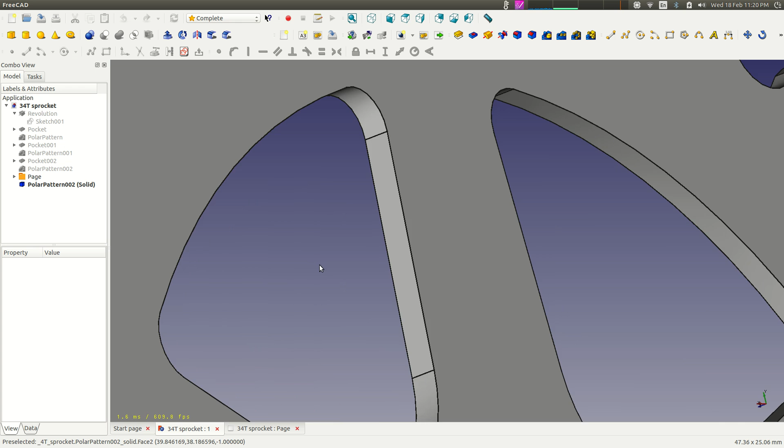I think with this one we're going to go over a few of the techniques we learned before, and we're going to try to build something a little more complicated, or just something that we're kind of used to. So today we're going to try to get this built here, just a regular bicycle sprocket, something pretty common, but has some interesting, difficult features that may not be as easy to make as it appears. So this is what we're going to try to make today, something similar anyways.

I'm not going to really worry myself with dimensions, but things like these should encompass all the tools that we learned before. So there's kind of a drawing schematic of it there. Not really that it has anything to do with anything, but all right, let's get it underway.

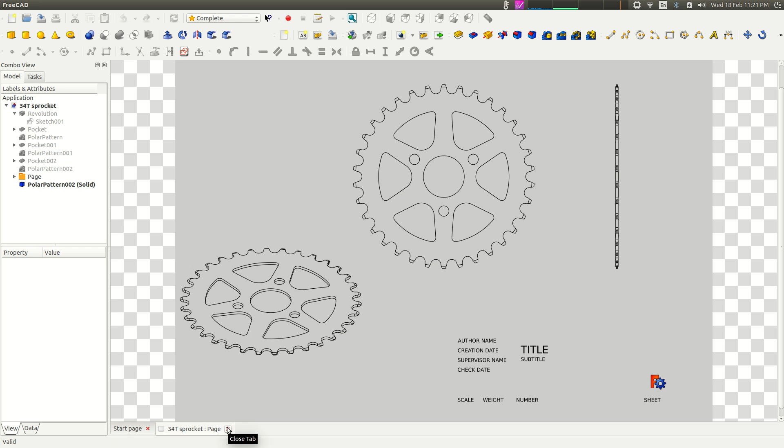So as before, you open FreeCAD, choose your workbench. I always like to do Complete, just because I've got everything I need. I don't have to switch between workbenches all the time, which is nice. So I'm going to open up a new one, call it whatever you want. I'm going to call it tutorial2, but where am I? Way in the middle of nowhere. Here we go. Alright, so tutorial2, we're going to make a sprocket.

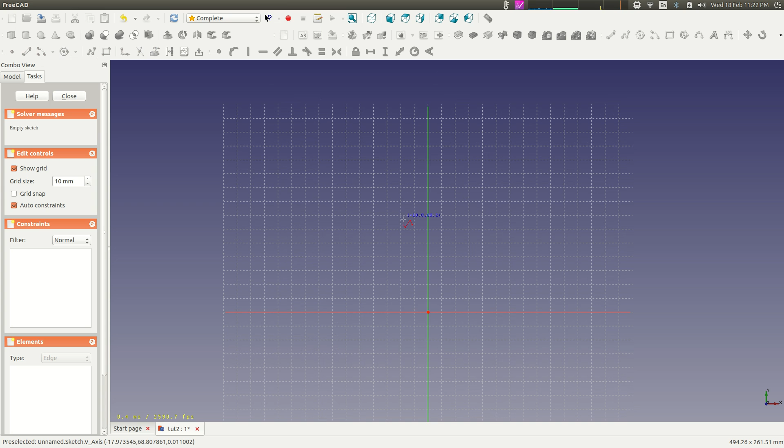So there's a number of ways we can go about this. Essentially everything looks like it's cut from a disk. So what we're going to do right off the bat is make a disk. As before, you're going to open up a sketch, put it on any axes you want, doesn't really matter. So this is where we'll start. The disk was pretty thin. I'm just going to use the polyline again. You noticed at the top that it had kind of a taper edge, so we could either make that now or we could make it later. I'm going to make it right now. So there's your sketch there.

Obviously now I've got to constrain it, so with everything, constraints is everything. And remember with revolving, we're revolving about this axis, and you notice that there's nothing on the other side of the axis, so that's really important. You can go right up to the axis, but you can't build stuff past it if you're going to revolve it, because then it'll revolve through itself and it'll throw a bunch of errors and you'll be pulling your hair out a little bit.

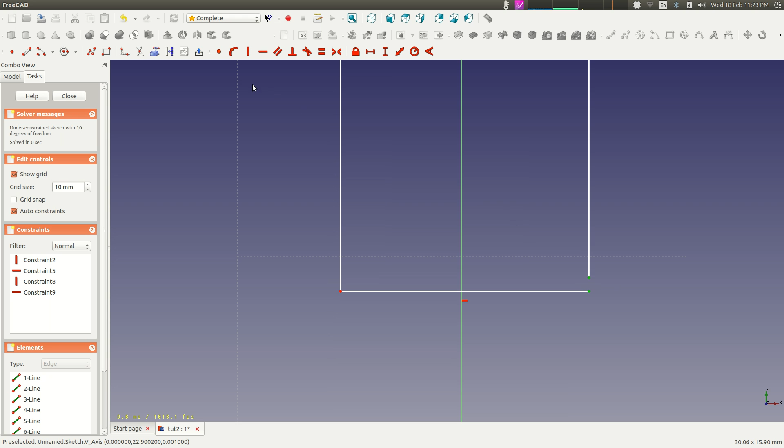As you can see, I've got some vertical constraints here that the computer's already preconceived that I wanted. I want this one horizontal as well, so I'm going to make that. As you notice, those are not touching, and we need a closed surface. So if I were to try to extrude this, it would not like that at all. So I'm going to make these two connect by using the coincident constraint, which is this dot one here, and it's going to bring them together. I'm going to check to make sure these ones are all okay. They all look like they're together, so that's good.

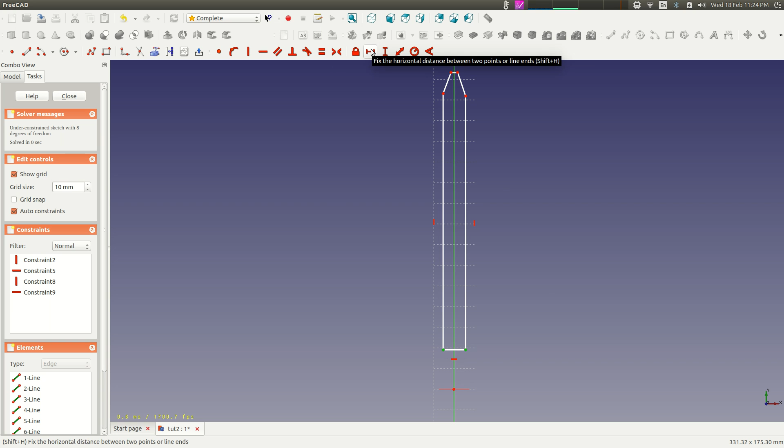So now we're going to start defining some dimensions on here. Let's make a width of this. This is all in mils, so typical sprockets are probably no more than 2 or 3 mils wide. Let's make it 3 millimeters wide and see where that takes us. As you can see, that did some pretty crazy stuff there. What I'm going to do is throw a symmetry constraint here to make things a little bit easier. I want those 2 points symmetrical about that line. Go up here, click symmetry constraint. As you can see, it's done just that. Similarly, I want those 2 points symmetrical about that line. I'm going to do just that.

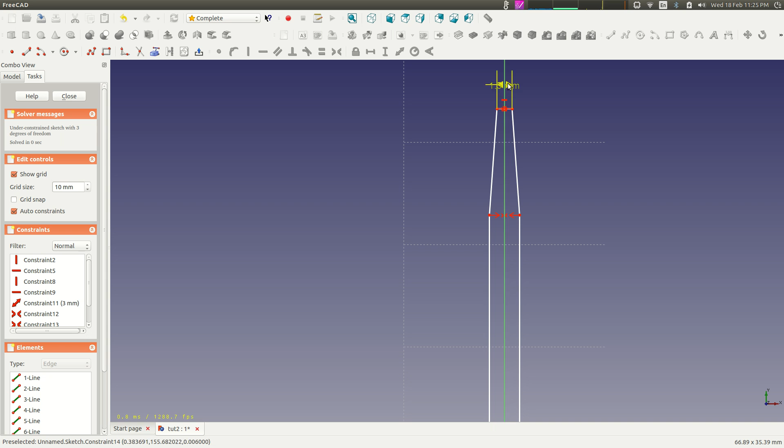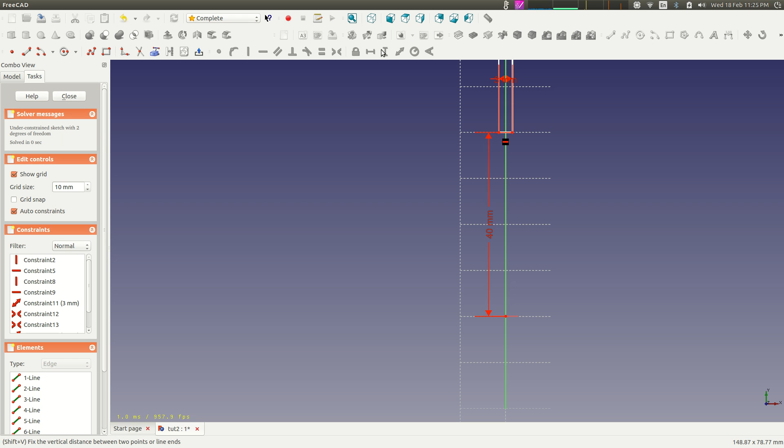I'm going to define this length here, so maybe the top edge is like 1.5 mils or something like that. Let's make it a little bit more. Let's make it 1 millimeter. A little bit more angle there. As you can see, it's a completely perfectly mirrored image. So there was some hole there. I'm going to make it maybe a 40 millimeter radius hole, which should give me some stuff to work with.

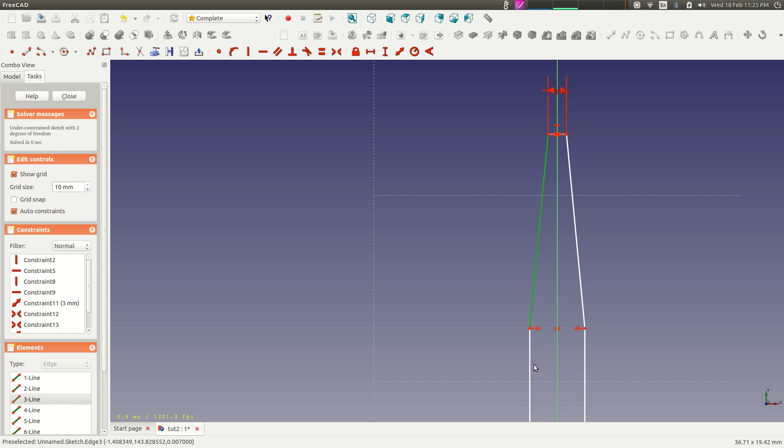Up here, say you needed a specific taper or a specific angle, let's say it needs to be 30 degrees between here or something like that. If you try to use the angle constraint, which is this one right here, you'll see that it doesn't make the angle where you want it to.

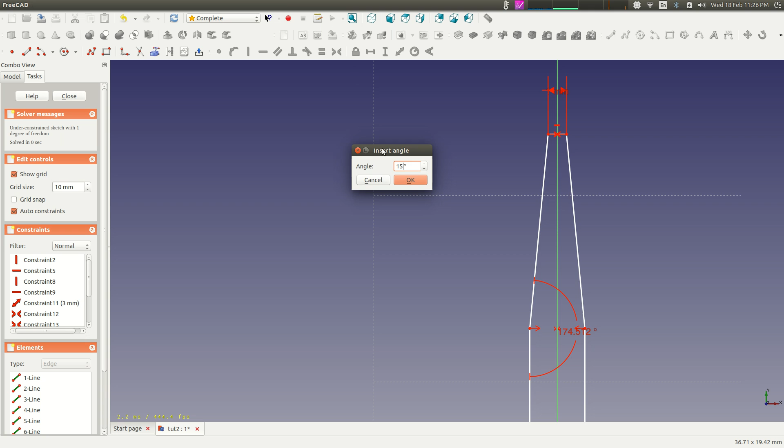So that could work. So you could do some math and kind of backtrack and figure out that if we needed 30 degrees over there, then this is going to be 150. So you could do it like that. Type 150. We get something like that, which means that this one over here, since this is 180, that's going to be 30 degrees.

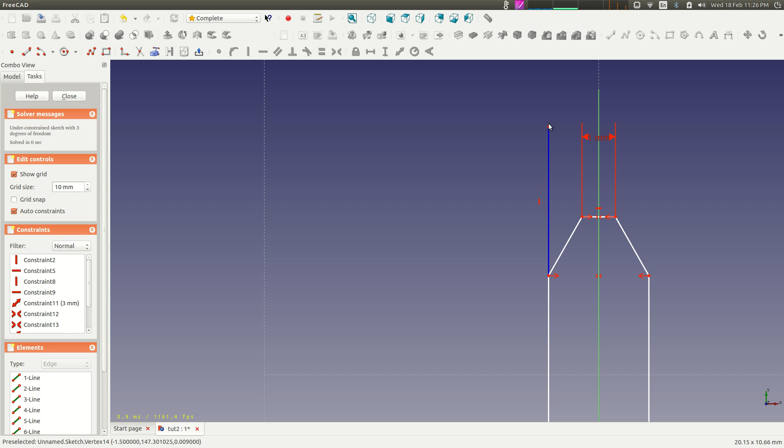And then what you can do is you can select that and this one, and you can make an angle between those, and I'm going to make it whatever I want. So that's another way you could go about it if you wanted to, which would make things easier in the end. Maybe you need it 18 degrees or something like that, something set by the manufacturer, whatever it is, right? So you got your angle there.

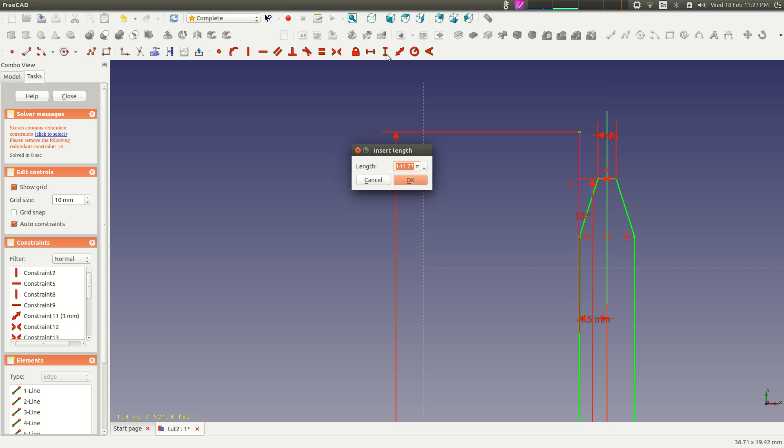Let's make an overall height on this. As you can see, I'm pretty much fully constrained here, but if you look over there, it's throwing some errors. So let's just go and see which ones it doesn't like. It doesn't like constraint number 18, so you go down, I'm going to delete it. Which makes sense because kind of given some things some height. And okay, so we're all set there.

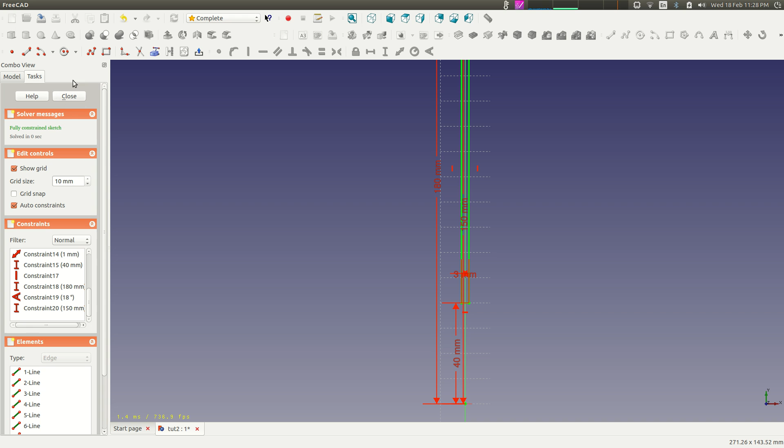I guess what I should have also done is the way I defined this line here made it kind of small, so it wasn't taking into account the actual height here. So I'll make that 180 as well. There we go. Alrighty, so we kind of got the cross section of our sprocket here. So now that I'm happy and that sketch is fully constrained, I'm going to close out of the sketch, and as you can see, I'm left with this here. So now I'm going to revolve this about an axis.

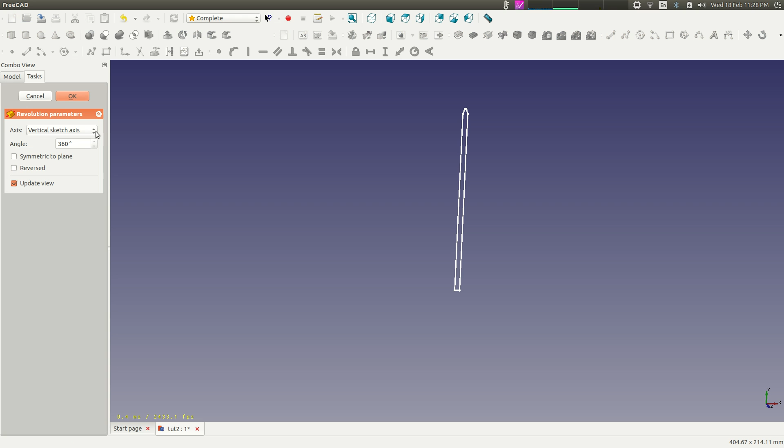So I'm going to go sketch there, and I'm going to click revolve. As you can see, it's trying to do it about the vertical sketch axis. I don't want it about that axis. I want it about the horizontal. And there it is there. Our nice pizza disc looking thing.

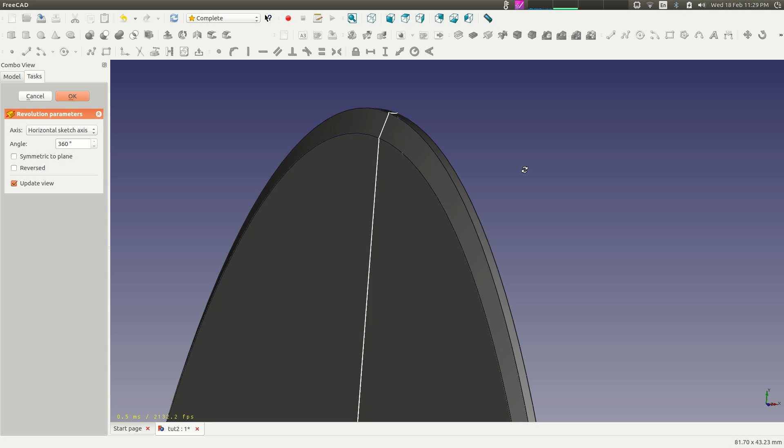So what we could have done is just obviously made a cylinder and then used our fillet tool to make this edge. But the problem is you can't define the angle of the chamfer or the fillet at this point. So it would just be at 45. So in this case, if you needed it to be at 30 degrees, something like that, then you would have had to draw on this anyways.

So we got our disc there. That's all looking good. We're happy with that. Click OK. So that's our revolution there. It's made up of this sketch. I'm going to unhighlight the sketch so we don't see it, because I don't really want to see the sketch anymore. So there's our disc. So now we can start making the teeth. Let's do that, because that's a hard part.

There's a number of ways we can do this. You could make 40 or 50 different sketches and try to cut each one out of this pizza disc here. Or you could make one pocket like we did in the last tutorial, and then polar pattern that pocket all the way around, which is a lot easier. So you only need to make essentially one cutout and then duplicate it around.

But remember, with polar patterns, only pockets can be patterned. So that's something to keep in mind. So you don't want to make an object, cut it out of this one, and then try to polar pattern that cut, because it won't pick up the cut. It won't recognize it. So it's best always to do a pocket.

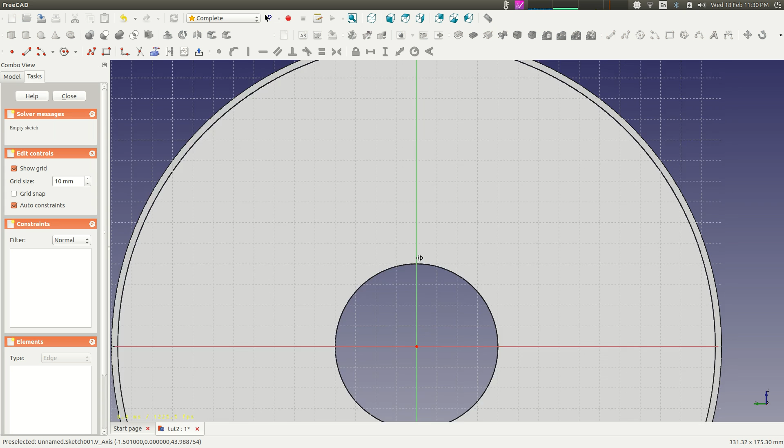So we're going to select the surface that I want to draw on. So that's the one there, and I'm going to create a sketch on that surface. So now that we got a sketch, I'm going to start making a cutout here. So in our thing, it kind of came down like this, looped a little bit, and then came back out. Kind of what a tooth looks like. So maybe you start with a circle, definitely a circle in there somewhere for the bearings of the chain.

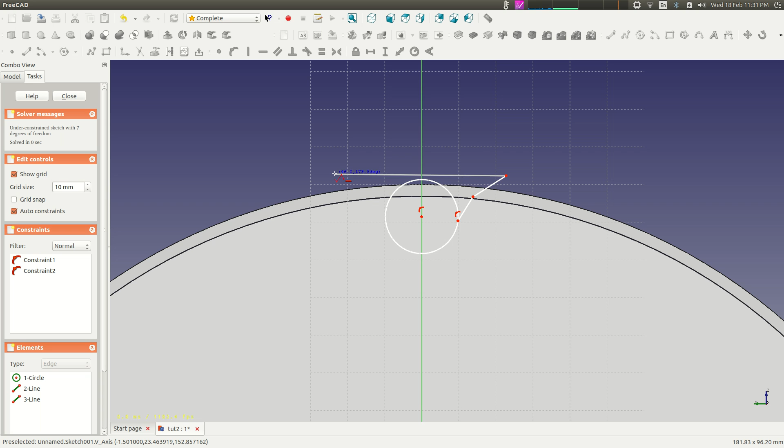And maybe it, actually I'm not going to use that, I'm going to use the polyline, so I don't have to keep clicking it every time. Maybe it comes up like this, and maybe there's a bit of angle on that as well, and then I'm just going to kind of put a random line out here. Doesn't really matter. Something like that again, and like that.

And so now I'm going to use the slice tool, or the snip tool, to get rid of that thing inside there. And really important with the snip tool is these have to be connected or it won't snip it. So if it's not working, that's one thing to look into to make sure that it is working.

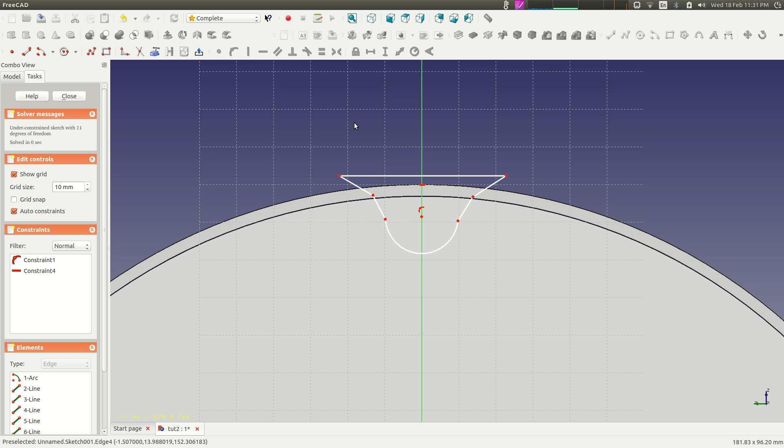So now, as you can see, there's a lot of constraints here to do. There's lots of degrees of freedom. So right off the bat, since I kind of want this to be symmetrical, I'm going to impose some symmetrical constraints here. So click 2 points and the line that I want it to be symmetrical over, and then create a symmetry constraint. Create a symmetry constraint with those and with these here.

So now if I change something over here, it's going to change on the other side. It's all mirrored about this axis right here. As you can see, this shows the 2 points that are constrained, and this little indicator here shows the axes that they're mirrored over.

So maybe I want something kind of like this. Maybe this needs to be down farther. It needs to be kind of like that. Maybe some dip like that. So that kind of looks like it could be a good cutout. Obviously, you can make these measurements if you're trying to duplicate something in real life, and then that's going to make things a lot easier.

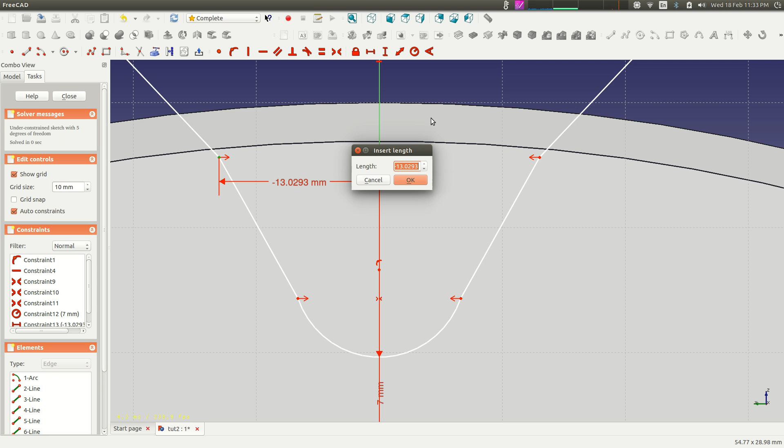So I'm going to make this 7. Make everything a little bit smaller here. Diameter. I'm going to define a width there. Maybe I'm going to make that 10. Oh, see, so I messed up there. I should have known that everything on this side measured from this axis over should be negative. So you see it crisscrossed it there. So we'll just go -10 and it fixes it right up.

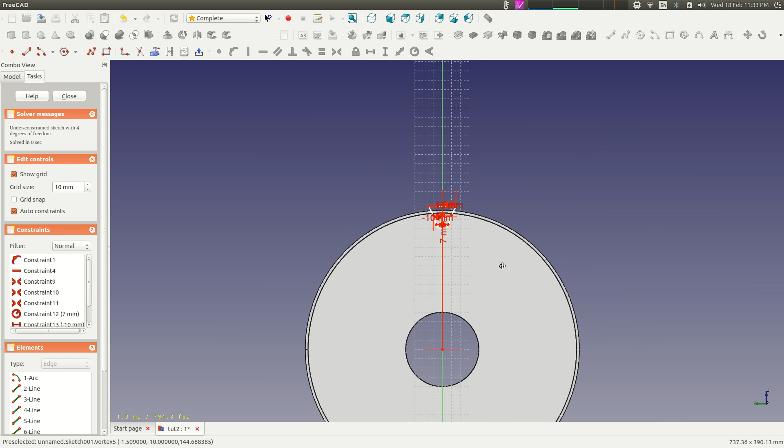So maybe I'll make sure that that's constrained as well. So maybe go 15. There's still a little bit of angle there. Maybe I want these a little bit lower though. Yeah, it's kind of looking good. This looks really high though, so I'm going to move this up a little bit. Oops. I'm going to impose a constraint to make these tangent. So make some tangent, which is really nice.

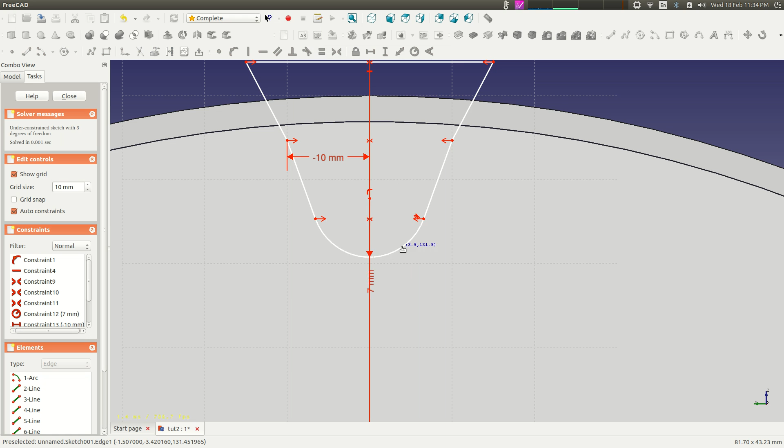So let's choose this height here. That'll add some constraint. Go 140. Looks high enough. Choose this length here. So yeah, we'll leave it at that. That looks okay. Choose this length here, and as you can see, I've fully constrained it. So it's happy with everything. Happy, happy, happy. So now I can extrude this if I want.

And if I want to make adjustments, like say I don't like these widths here, or I don't want that to be negative, maybe I want that over here, you can make the adjustments. So maybe I'll make this a little bit skinnier. So it obviously didn't like that I'm making it 9. I think that's because of this length here, so you might need to delete some of these in order to adjust these the way you want.

Oh, it doesn't really like that at all. I might make that 11. Doesn't seem to like that at all. Not quite sure why. Oh, there it is. Okay. Alright, so we'll try to make that again. I'm not sure why it wasn't liking that. Oh, it's because I forgot to delete it. There's something wrong over here, sorry. Delete that constraint there. There we go.

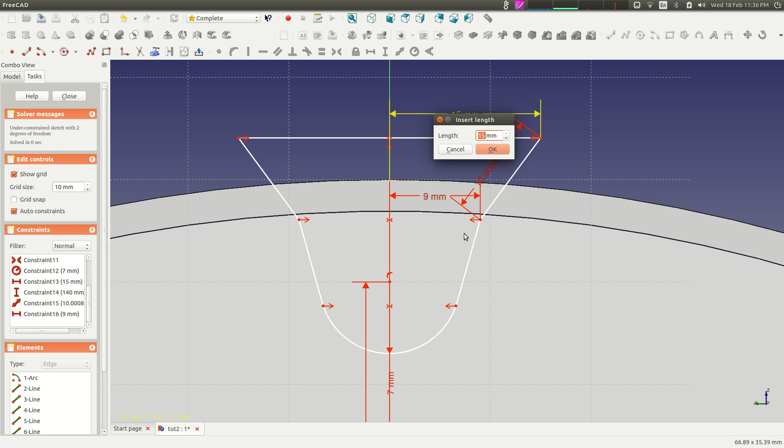So now, go back to 9. And yeah, maybe I won't make that one as much, because I see what I did here: I've actually defined the diameter of that circle there, and I've decided where the center of it was. It didn't like that, so make that 13 just to kind of get the right shape here. Yes, I mean, don't mind that.

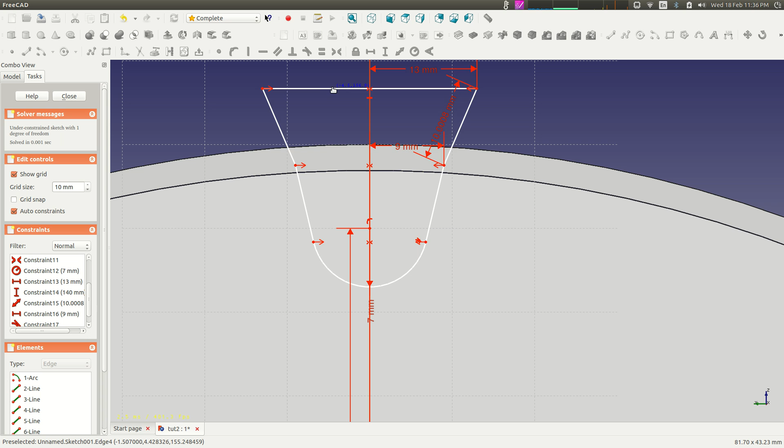I should be able to hopefully make those tangent, I think. There we go. There's still 1 degree of freedom left. That height there, so I'm just going to select that height. There we go. So now she's fully constrained. Good to go.

Alright, so this is one thing to consider when making gears and cogs and stuff like that: obviously there's inner dimensions, but there's also outside dimensions as well, right? Like the width of the teeth here, there's going to be some dimension to those, right? And obviously with the method I'm doing here, I'm not distinctly defining those.

But if you've defined these ones accurately and you've duplicated the exact number of teeth that there are, then by definition you've already defined the width of those teeth there, so it should all work out. It should be good. So you should still be able to get the correct width of teeth and stuff like that.

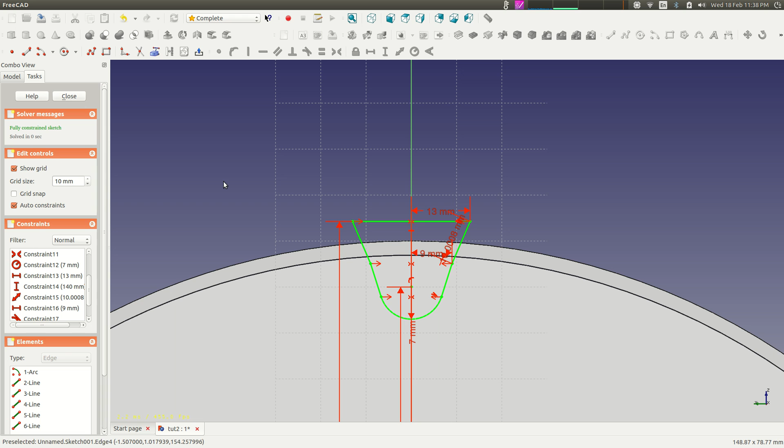So now that I'm happy with that, I can take that and I can pocket it. You select the sketch you want to pocket. You're going to click the pocket tool, which is this one right here. As you can see, I'm going to make it through all. And so there's our pocket, our little cut there. So that's kind of where one little chain eyelet would fit.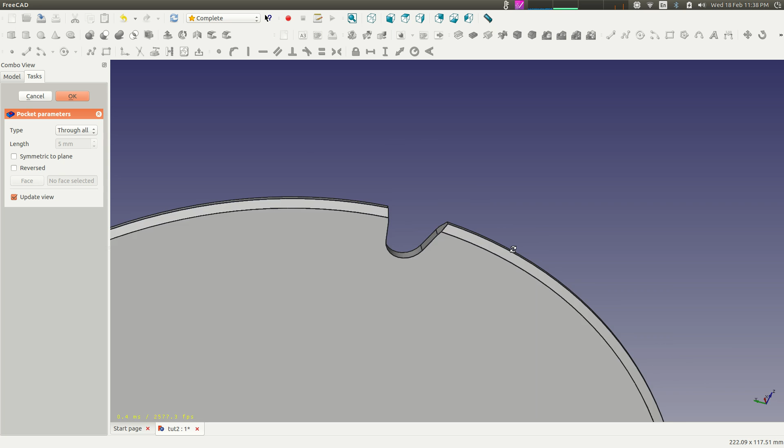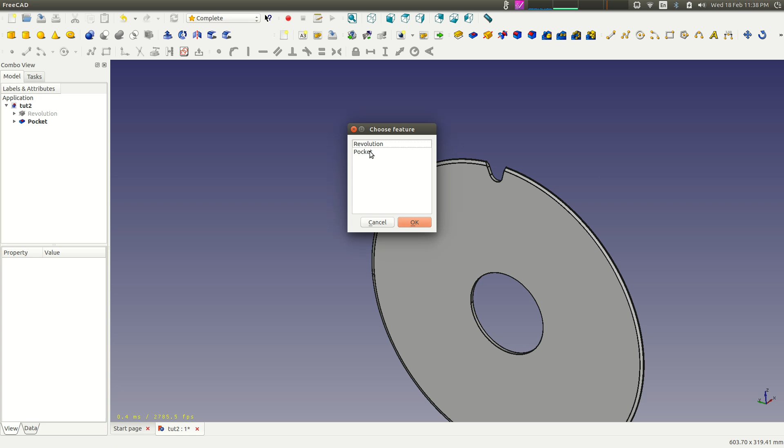So now what I want to do is duplicate that over a couple of times, however many teeth there are on there. So I like that pocket. I'm going to click OK, and go up to polar pattern, and as you can see, it recognizes a pocket as something that it can pattern. So click OK. Get a better view here.

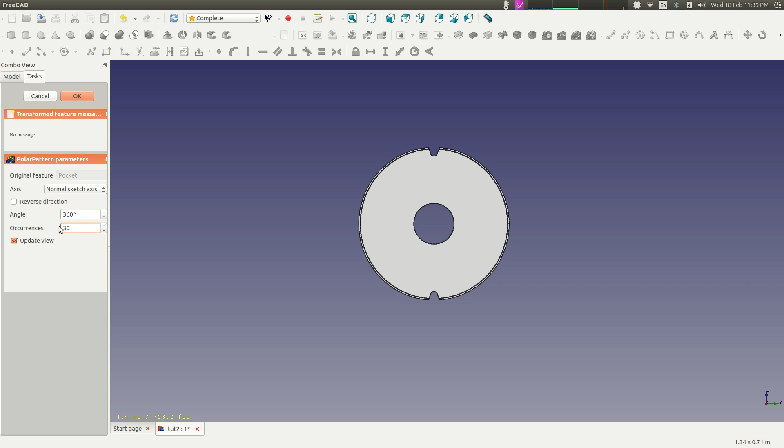So now I'm going to decide the number of teeth. If you're making something from dimension, then you'll know the number of teeth, so you just enter however many teeth you need. In this case, since I've kind of arbitrarily decided the diameter of this and the size of the eyelet, I may have to play around with it to get the right number of teeth. So I'm going to try 30 right off the bat and see what that looks like. That's looking pretty close. Obviously the teeth are a little bit wide, so it's probably like 36 or something. It's probably closer.

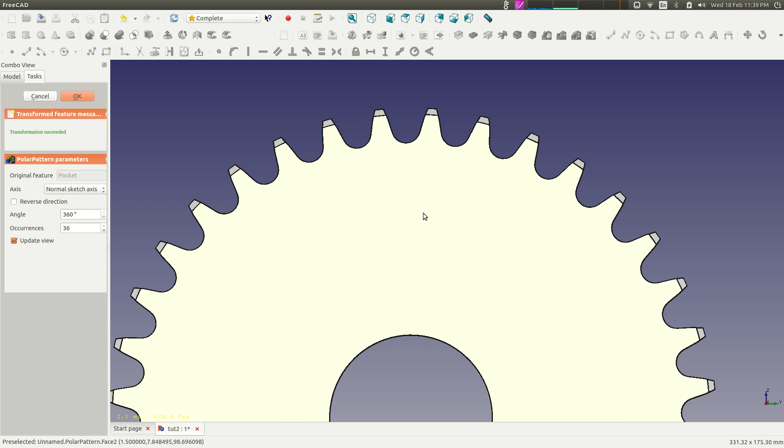So remember, adding 1 isn't going to just shave it off. Adding 1, you're essentially taking however many you already had previously and adding the 30th of each one to it. So that's looking better. That looks more or less like an actual sprocket, I suppose. Once you like it, click OK. And once your computer starts processing, you'll see that you've got your pattern there.

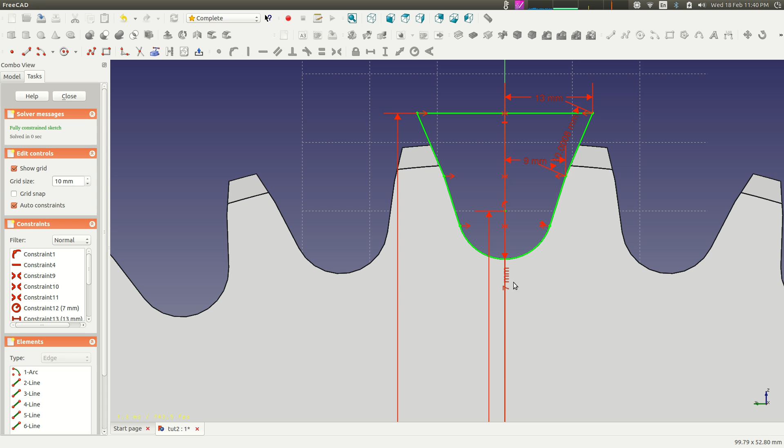So it's very nice, very easy, very quick, and the thing is if you don't like the shape of that, or you missed a dimension or something, you go back and you can edit this. Maybe this needed to be a different dimension, or this dimension here needed to be different. Maybe this needed to be 9.5 or something, and it'll make the adjustments for you right there, and you'll see them occur here.

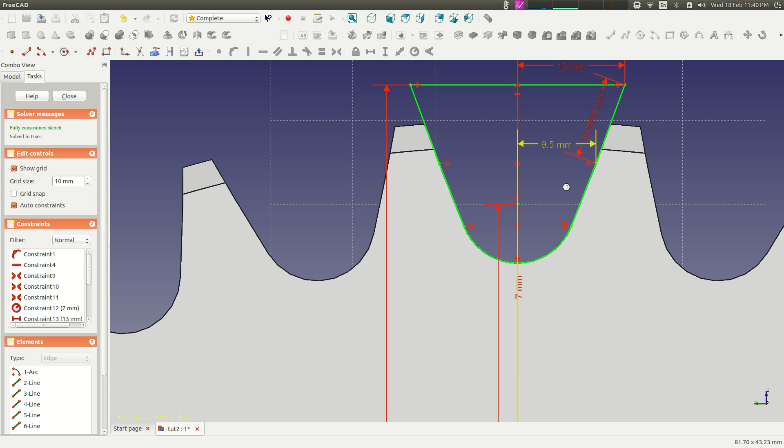So now you see that these are pretty straight, right? So I'm going to take it back to maybe 8.7 or something. You'll see that it'll make the adjustments to all of them in the polar pattern. So that's a really nice feature. So once you're happy with that, you can keep it like that. So that was one portion of it.

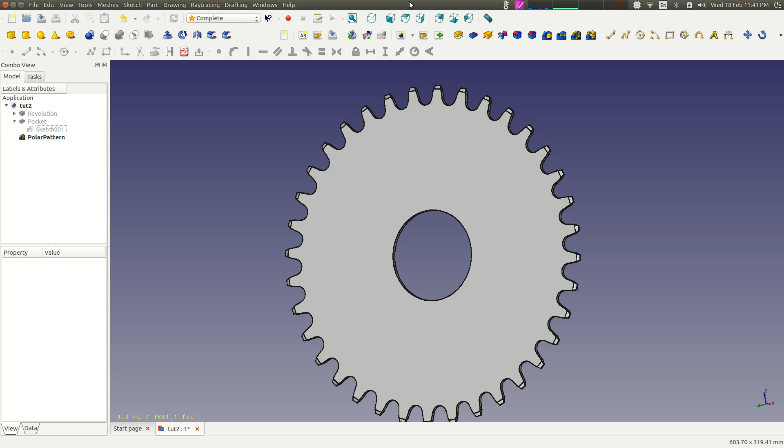And as you recall, there were also cutouts of the sprocket as well, so we'll put those in as well. So click the face that you want to sketch on. Make sure that everything else is unhighlighted. Click on the face that you want. Click the Make New Sketch button, and you're back making a sketch on that face there.

So which one is it? It's this one right here. All right. So where is it? No, it's... I don't know which one it is. Jesus. No, it's definitely this one. Alright, so you click on the face that you want to be on.

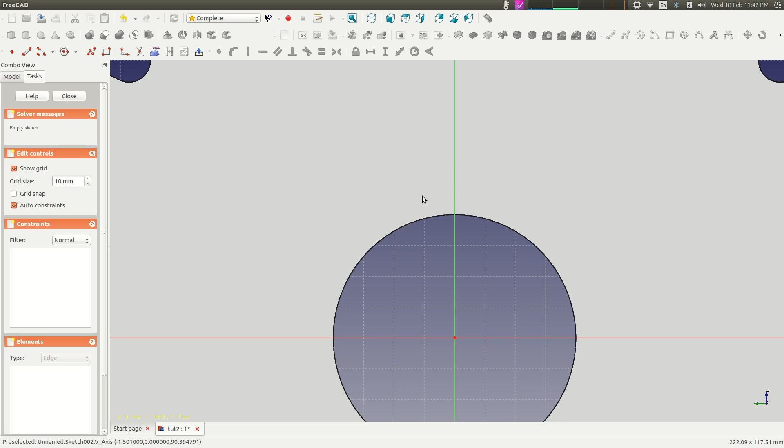Alright, so now we're going to make that kind of weird shape there. It's kind of a triangle-looking curve thing. I believe I did that with arcs. So you start with one arc up here. As you can see, this is a little bit difficult to see, so you could either hide the rest of your sprocket, or you can just keep it where it is. It's entirely up to you.

There's also a little bit rounded like that, and there was one at the bottom here that was centered. The nice thing about constraints is you can just draw it out and not really care about where everything is, and then you just make everything fit later. So this isn't really looking like it, but it will in a little bit here. So we'll just put it together piece by piece here.

So I'm going to kind of move things around here a little bit just to make everything fit a little bit better. Alright, so as you recall, these curves were always tangent. So I'm going to use the tangent constraint and start making them tangent. But before that, I'm going to make this all symmetrical. It's probably easier, because then I'll only have to do everything to one side. So I'm going to make those 2 points symmetrical. I'm going to make the centers of those arcs symmetrical about that axis.

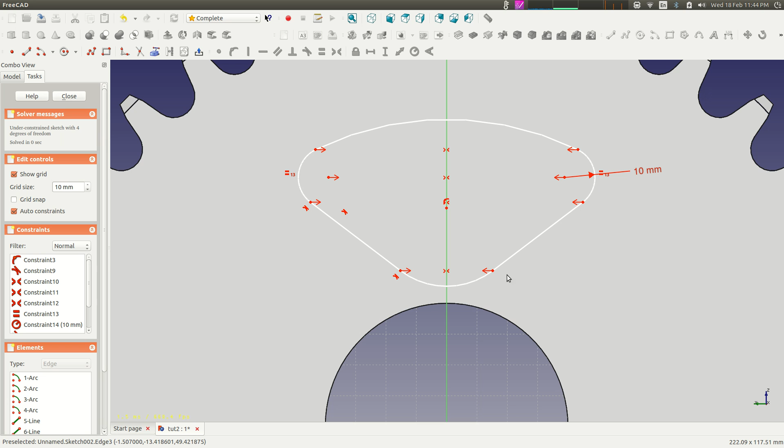And now I'm going to make these tangent, just on the one side, which will do it on this side too because everything's all symmetrical. I think anyways. Oh no, didn't quite. That's because these 2 points aren't symmetrical either. So I'm going to make these points symmetrical as well. And there we go. It's a little bit better. Now I'm going to make those tangent as well, which will make that tangent as well. So as you can see, everything's looking pretty close. We're getting pretty close to the shape that we wanted.

But as you can see, I can move this up and down to some extent. So now I'm going to give this a height here. I'm going to make this maybe 90. Oh, it doesn't like that. Something's happening here. So I think I've imposed too many symmetrical things here, so I'm going to get rid of a couple of them here. Maybe get rid of that.

Oh, I think it has a problem with this one. Maybe this is a killer here. Yeah, so that was the one there. So, all right, I'm gonna put those ones back because I think that was the one that was killing it. I believe it's this one right here that's giving me the trouble. So there's still a few glitches in this program, but you can kind of figure them out as you go, I suppose. So I'm going to give this a height here. What I'm going to do is make these two the same, which will kind of force everything else to be symmetrical. So that's a little bit nicer there. So we'll give that a height there.

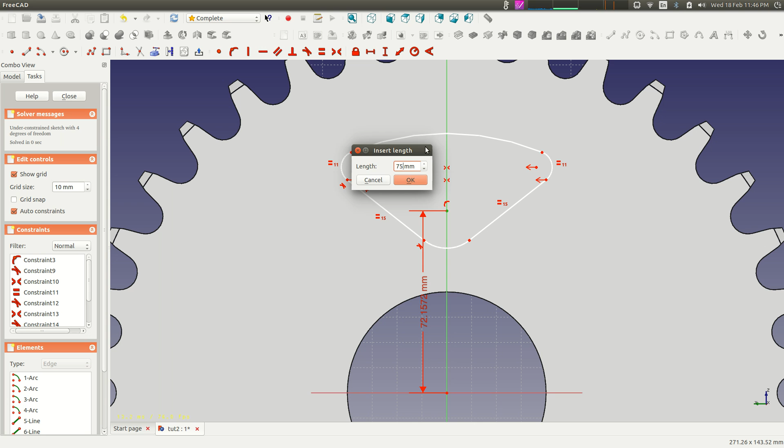So sometimes you might have to do a little bit of backtracking to try to figure out why it's not working. So I usually always just go back to the last couple constraints that I made. If things aren't working out, then it's probably that one that's causing all the problems. So that's a height there. Maybe I'll define a width there. Go a little bit more, 45. Make it a little bit bigger. And I think if I just do a length on these, it's probably going to be pretty close. Not quite.

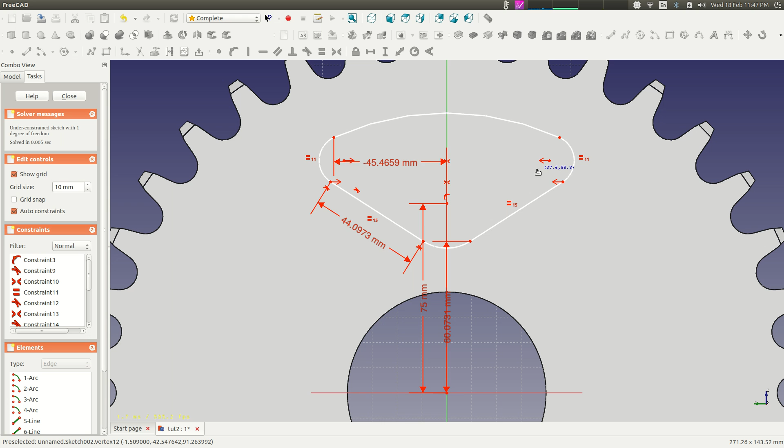So there's one more degree of freedom, so it's obviously that one there. So maybe I'll just define a height of one of these. Still, something can still change here. So obviously the height of these will probably fully constrain it. There we go there. So I like that. Depending on how your things are dimensioned or how you measured everything will really denote how you constrain things. So as you can see, I've just locked down a bunch of stuff, right? But obviously you're not going to actually make these measurements, right?

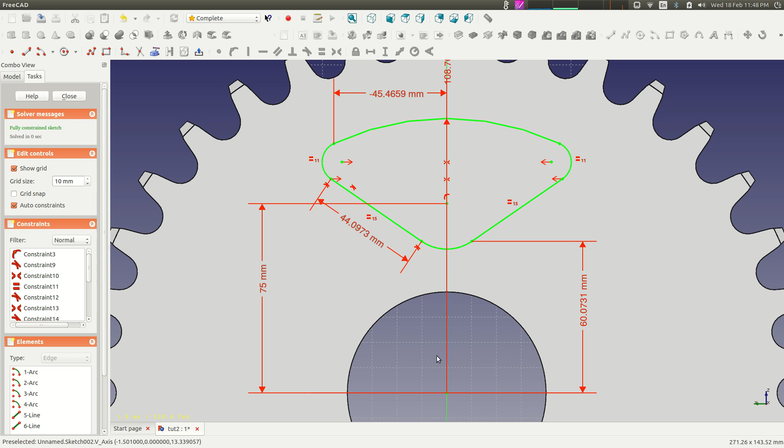So obviously one would probably be the radius of this right here. So instead of this height here, you could actually probably just do the radius of this, which would be the exact same. It would still constrain it, but how you're planning to measure all this stuff will really denote how you're going to constrain it, right? So you could probably measure one of these. You could probably get an estimate of the diameter of those, diameter of that, where this sits in here. And if you can't get it with this, then you can also make a bunch of construction lines to measure stuff from, to constrain stuff. So it depends on how you want to do it.

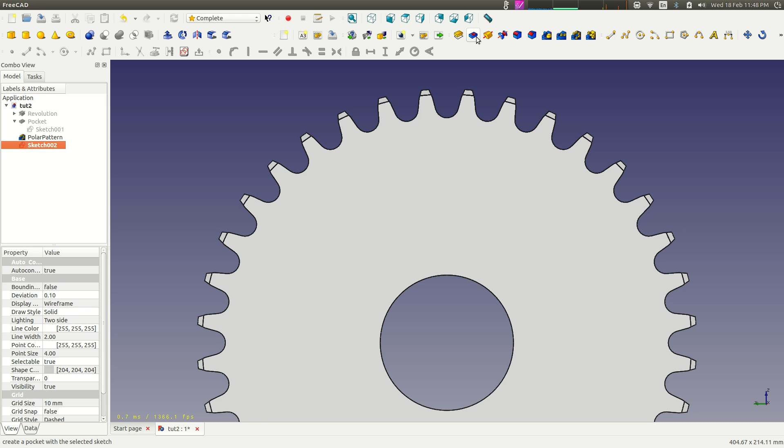So once you're happy with something like that and you're fully constrained, you can close it, and we're gonna pocket this again. And so there's our pocket there, and I'm gonna go through all, click OK. And so there it is there, and maybe I want to polar pattern this now. So that was the pocket there. It recognizes the pocket. Click OK.

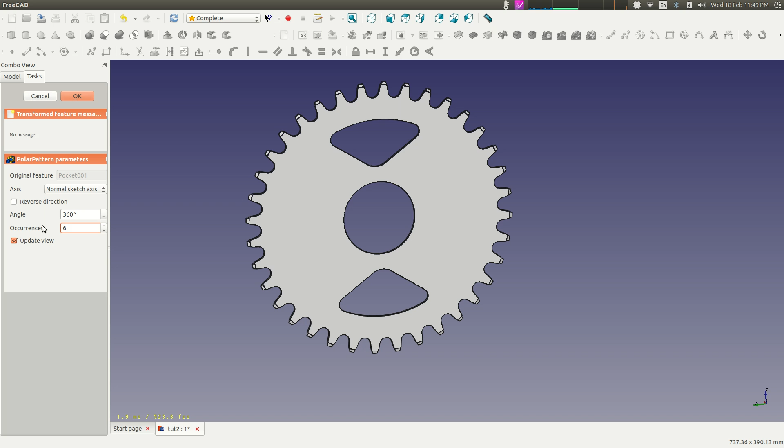It's going to bring up the polar menu. Decide how many occurrences we want, maybe 6 or something. If it can fit, ooh, just barely. So maybe only 5 in this case. Maybe only 5. So yeah, 5 will do there. 5 will fit nicely, and it doesn't look too stupid.

Once you're happy with that, click OK. And from what I remember, we also had holes in here too, so that could be another tricky thing as well, especially when making the holes in the correct spots. So you could either reference it to a hole or an edge.

Or you could just try to set this up so that things are in the right spot. I'm just going to open that sketch and see where everything is. So obviously we've got it centered on here, so to make these holes, we're going to have to make a couple patterns here.

So I think what I'm gonna do is make this a little bit smaller. Make it 30 - oh, that's gonna be too small, I think. Oops, I forgot to make it negative because it's on the other side. There we go. Oh, it doesn't like that - it's too small.

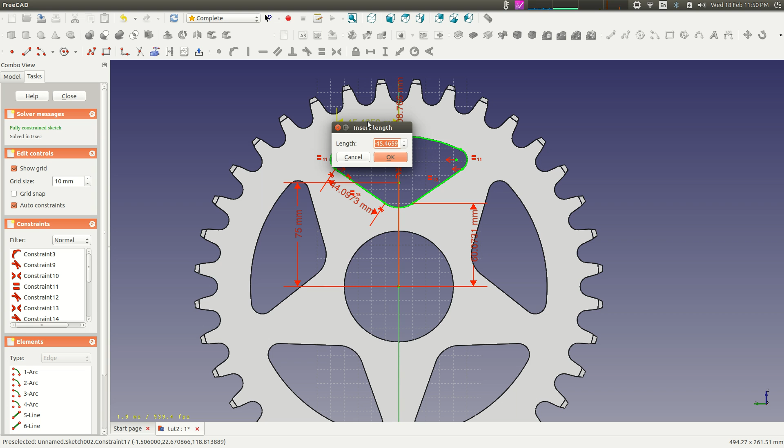I'm gonna delete that. Make these in a little bit. So, depending on if you're building something from a dimension, then this would obviously not be as hard. I'm trying to make this 40 here.

Doesn't like that. Probably has to do with these here, so I'm going to delete that. Make that 40 and see what it does. Yeah, so that's a little bit better there.

Based on that, that should still be able to make a tangent somewhere. I'm not sure why - it's just got too many constraints or something, maybe. So it's over constrained, it doesn't like one of these, so I'm going to delete 13. Still 1 degree of freedom here.

Oh, I see why, okay. Based on this length here, it can't make that tangent, so I'm going to delete that there. I'm going to make those 2 tangent. So the problem was based on the new size, it couldn't make them. Yeah, it couldn't.

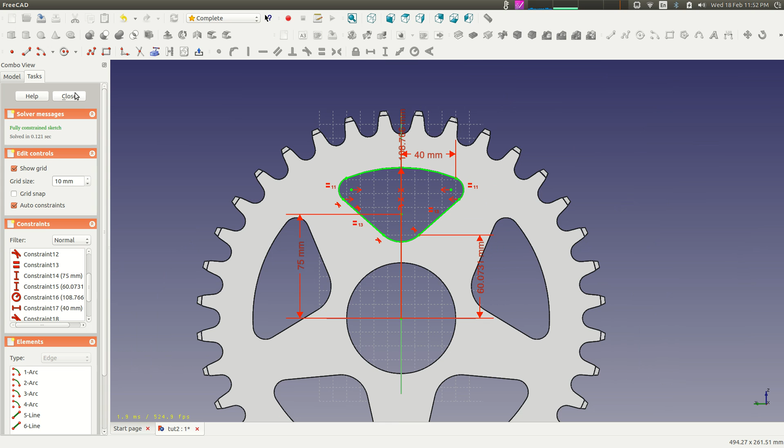I'm going to remake those symmetrical again because I kind of deleted that in the process, and that should fully constrain it there. So yeah, constraints can be a little bit challenging sometimes to try to figure out what's going on.

I'm going to edit this polar pattern here by double clicking on it. Should bring it up and try 6, because 6 will be a little bit easier than 5 - I won't have to do a whole bunch of silly math. So like that there. Still a little bit close, so I'm going to edit that a little bit, maybe. Edit this sketch, maybe make this a little bit smaller, 38.

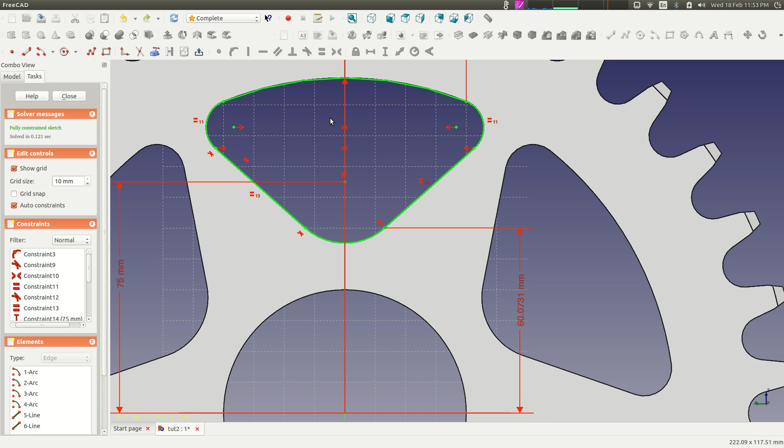Damn it, so it didn't quite like that. So I'm just going to keep it, actually. This is fine - there's too many constraints there, so.

So now what we're going to do is put some holes in it. This one is centered, this one is centered, all these ones are not centered, so we're going to have to create a bit of geometry in order to make this work, to get everything nice and straight.

Because I'm going to make another sketch on this surface here, if I try to put circles there, it's going to be really hard to get them in the center here - it's going to be really challenging to figure out. So the best way to do that is by creating reference geometry.

So I'm going to make a bunch of lines here, and what we're going to do is make them reference geometry - that's turning them blue. So that means they're not going to be included in the object, but they're used as reference for something.

So what I'm going to do is just make those 2 actually, and then we'll polar pattern it. So what you could do is make 6 of these and define the angles between all of them, then put circles on each one and pocket those circles. Or what I could do is just make one over here, and then polar pattern exactly 6, and it should work out. So I'm going to make an angle between these two, being that there's 6 and it's 360 degrees.

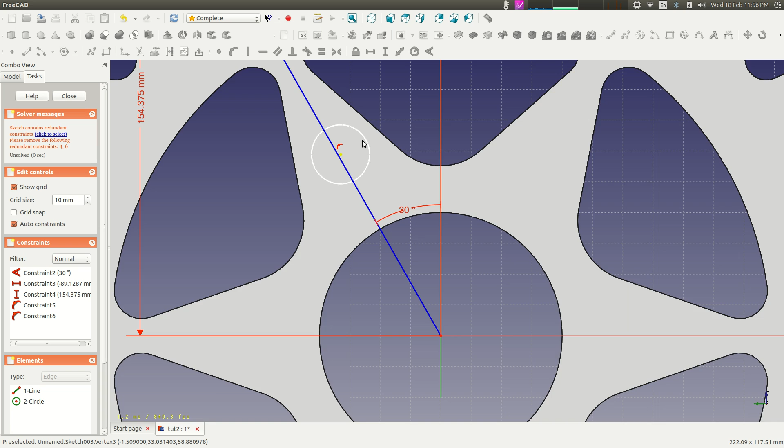And what I'm going to do is make a circle. I'm going to attach it to that line - you see it attached there when it highlighted, except it actually didn't put it on the center. Why didn't it do that? I'm not quite sure why it's not sitting on there.

I'm not sure what's going on here. Oh, I see, it doesn't like that. Okay, there we go. So there's the circle there. It didn't like the fact that I was defining a height there, so there's some glitch there.

Now that we've set that end, you can see it lies on there perfectly. Let me do that again to show it. So take your circle, the line highlights showing it wants to coincide the center of that circle with that line. Click, yes, that's what I want, then you decide its diameter, and you can move it around on there.

So I'm going to define a radius that this hole needs to be at. Oops, I guess it would just be a height then. Or what you could do instead, if you only had the radius, you could use a circle as well.

I'm going to coincide with that point there. You can also use a circle as reference geometry, so now this circle is not only attached to this point, but also attached to this circle. If I decide the radius of this circle to be 60, that's that circle right there. This one is always going to be on that line.

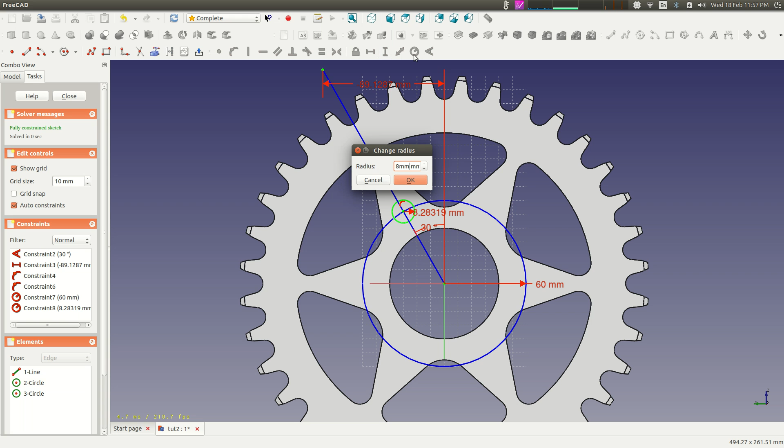So I'm going to decide the radius of our hole, we'll make it 8 millimeters. Oops, and as you can see, it's nicely in the center here. I can decide any radius I want it to be at, so maybe it needs to be at 65, that'll put it up a little bit. Maybe it needs to be at 60, whatever you measure.

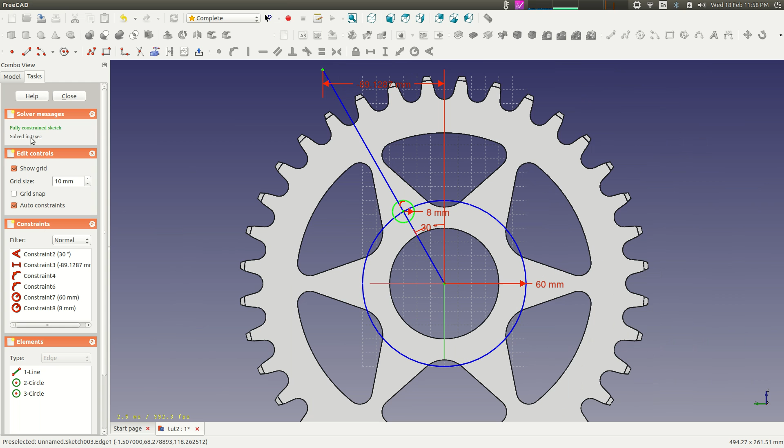Now that you're happy with that and it's fully constrained, you can close the sketch, and then we can pocket it as before. Select the sketch, click Pocket, go through all, click OK.

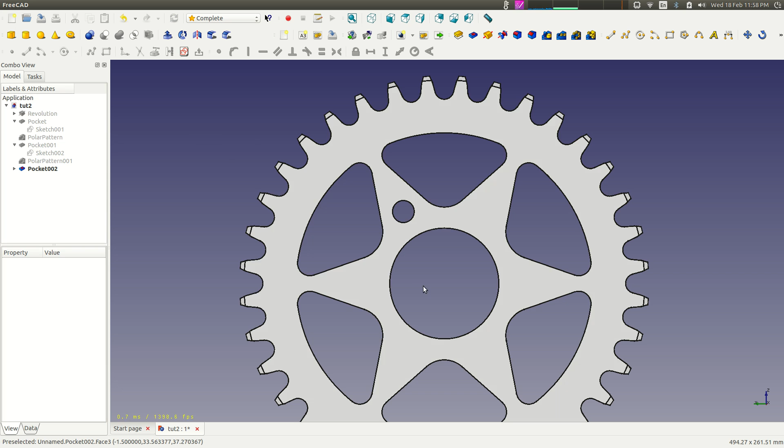Now you've got a pocket of one hole, and then we can polar pattern it just as before, pocket number 2, because pocket number 1 and the original pocket were the sprocket teeth and those holes. So we want pocket number 2, click OK. It brings up the menu again, and you choose 6, because that was the measurement we made based on the geometry.

You see it's centered in each one - these holes have been centered between each perfectly. That's one way we can efficiently do things by only defining the geometry of this one, knowing we're going to replicate it 6 times so it coincides with all these holes as well. You save yourself some time.

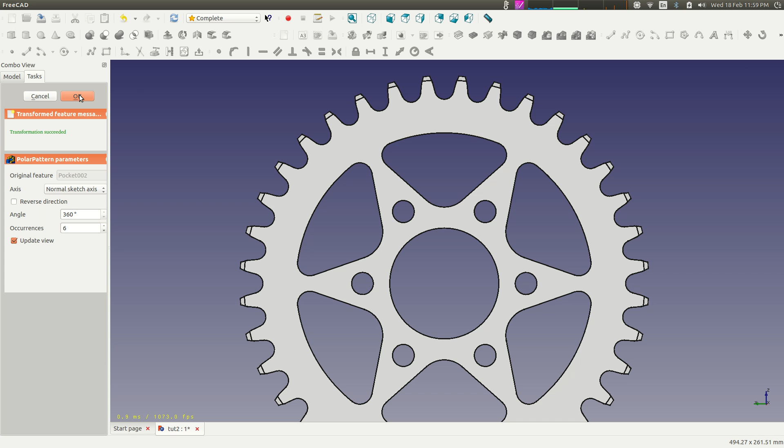When you're happy with that, click OK, and there's your sprocket. Doesn't look quite exactly like the other one, and that's just because of these dimensions. I think it looks a little funny, but that's generally how you do it.

When I made the other one, I precisely measured everything off an original sprocket that I had with me, so that one actually is a replica of a real one in real life, and it worked out quite nicely.

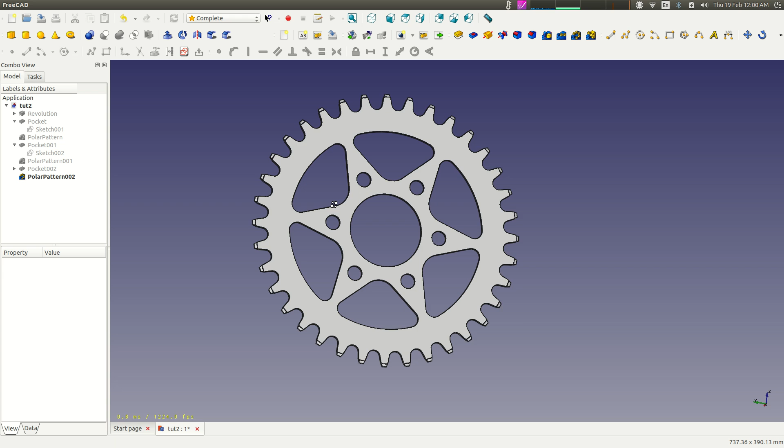So yeah, if you're happy with it, you can save it, and make it an object. If you wanted to export it, you've got to make sure you convert it to a solid. Once you've got a solid, you can rename it whatever you want - Sprocket 36 tooth - and you're done.

Later on I'll talk more about building assemblies and stuff like that, which can be a lot more complicated - that means there's multiple objects. If you're designing something, you individually create all the objects in separate files, then build an assembly file in which you bring them all together into one file. Maybe we'll talk about that once we get a few other tutorials here.

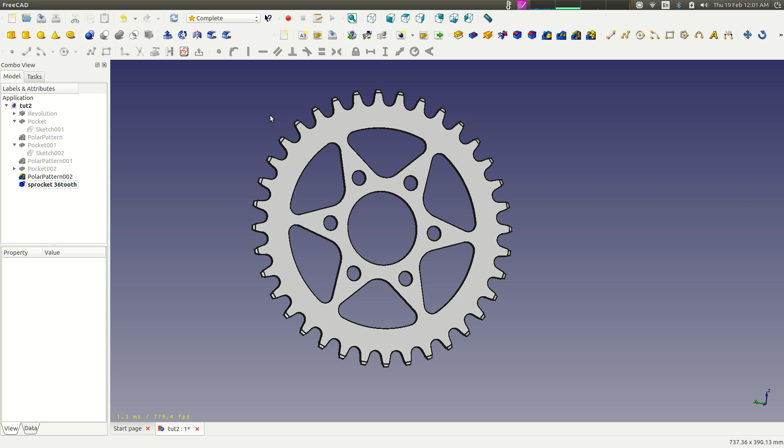I think this pretty well encompasses revolving and cutting stuff, so I may do one or two more - maybe one on a pulley with other notches and some complicated cuts. I may also show you how to make turbines, and another really helpful tool in the part workbench called the sweep tool and loft. These are also really handy, and I'll show you how to use those in the next tutorial. So till then, cheers.